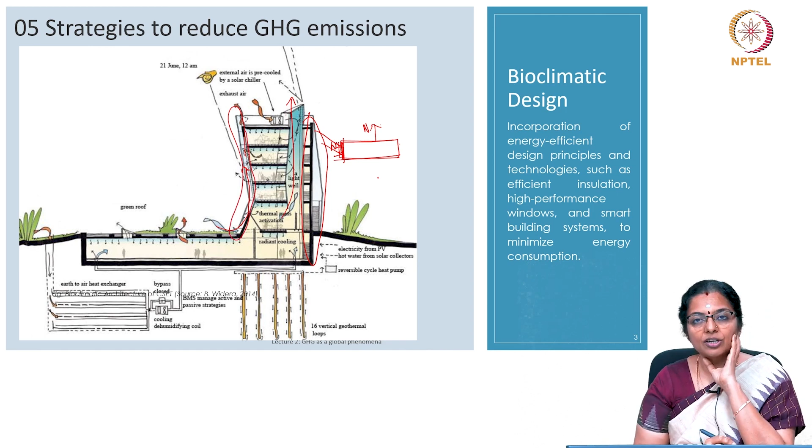Provision for natural ventilation. Here in this building you can see that there is provision for not only natural ventilation but different types in which the ventilation can happen. You have the ventilation along this, you have a shaft ventilation and so on. Then energy efficient envelope, the design of the envelope itself should be such that the building consumes less energy by virtue of making the indoors comfortable. This approach utilizes many features: orientation, natural ventilation, envelope design to decrease the load on artificial heating and cooling, thereby lowering energy consumption and greenhouse gas emission.

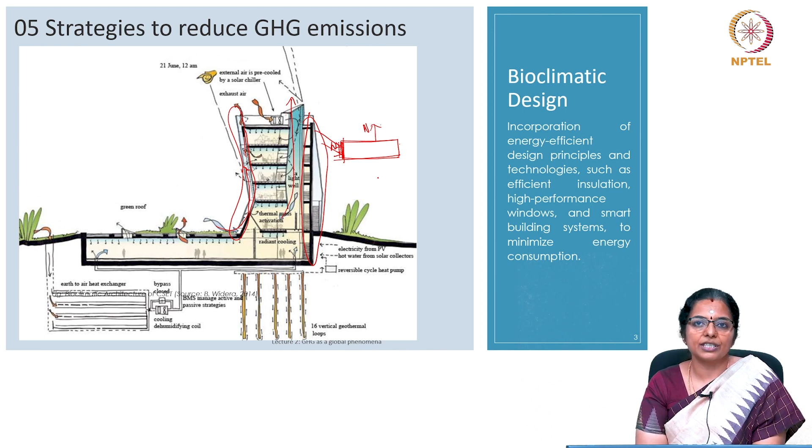Additionally, integration of renewable energy sources like solar panels and wind turbines and other sources of renewable energy, a focus on natural lighting and water conservation practices also enhance the overall environmental sustainability of bioclimatic buildings. In essence, the principles of bioclimatic architecture offer a holistic strategy to create structures that not only prioritize energy efficiency but also contribute substantially to the reduction of greenhouse gas emission.

Now, another strategy that can be used is renewable energy integration. Integration of renewable energy can happen in two ways. It can be on-site or off-site. So, renewable energy integration in the building industry involves incorporating sustainable energy sources to power the structure efficiently. It entails efficient powering of structures by incorporating sustainable sources. What are the sustainable renewable sources?

Solar is one, especially in a tropical country like India. Solar energy is the way to go. Solar panels. We have abundant resources for wind turbines. There are many places in the country where there have been sustained efforts to tap the potential of wind energy. The on-site clean energy generation reduces reliance on traditional power grids, cutting carbon emissions and promoting environmentally sustainable buildings. The shift not only contributes to a greener and more sustainable energy mix, but it also aligns itself with global initiatives to combat climate change.

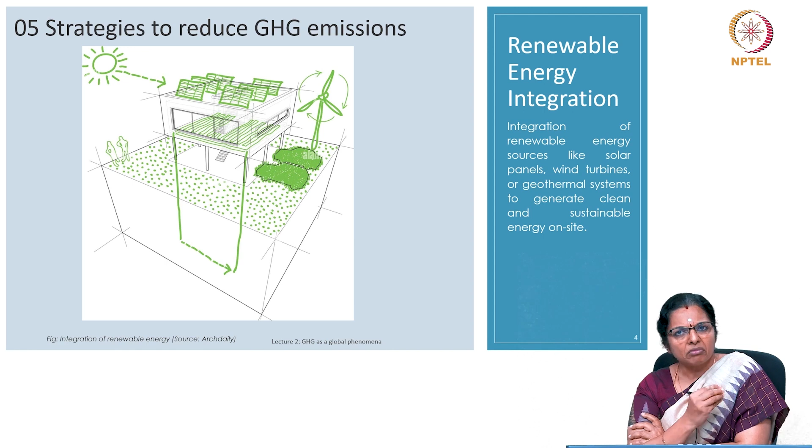Relying on natural resources and harnessing the natural resources, buildings can reduce their reliance on power grids, thereby lowering carbon emissions, because we already saw in last class the humongous amount of carbon emission because of the reliance on conventional heating strategies. And it leads to environmental sustainability by reduction in GHG emissions. The integration of renewable energy in the building industry not only contributes to a greener and more sustainable energy mix, but also aligns with the global efforts to mitigate climate change.

So, how all can we have this integration? We can have this integration by having solar PVs integrated in the buildings itself. The building itself can host it, or it can be off-site. Off-site meaning there can be solar panels which are not on the site, and the energy that comes from this can be given to the grid, and that energy can be used here in the building. That energy can come back here, or it can remain with the grid also.

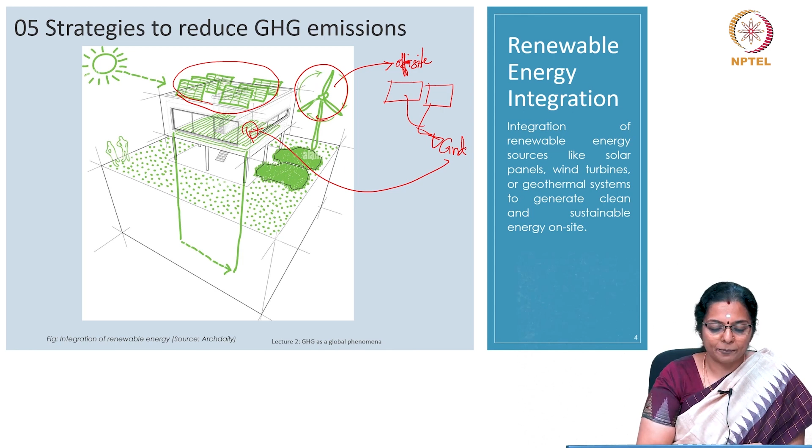That's up to you. Again, wind energy can be off-site. Normally, wind energy is off-site only. It is very difficult to have wind energy on-site, and so on. So, these are the larger strategies.

Another strategy is trying to get green building certification. There are a number of green building certifications in every country. For India, we follow LEED India, or we also follow what is called as GRIHA. So, right now we are having two major certifications. The third could come, which is called as the EDGE certification. So, these are largely Indian certification, LEED India,

At this time, in this class, we are not going to talk of certification, and therefore I am not speaking more on this, but we could have LEED India, GRIHA, EDGE. These are Indian based. All the other things that I am quoting here like BREEAM, CASBEE, Passive House, they are all adapted in Europe and the US.

So, of all the categories, in all of these green building certifications, consumption of energy, the amount of points, that is every building has to score certain points in some or many of the criteria. So, what happens is almost 30 to 35% of the points that are found in any of the rating system is attributed to energy efficiency. So, it is found that energy efficiency consists of 30 to 35, normally we will keep it as 32, of all the points available on average for the rating systems

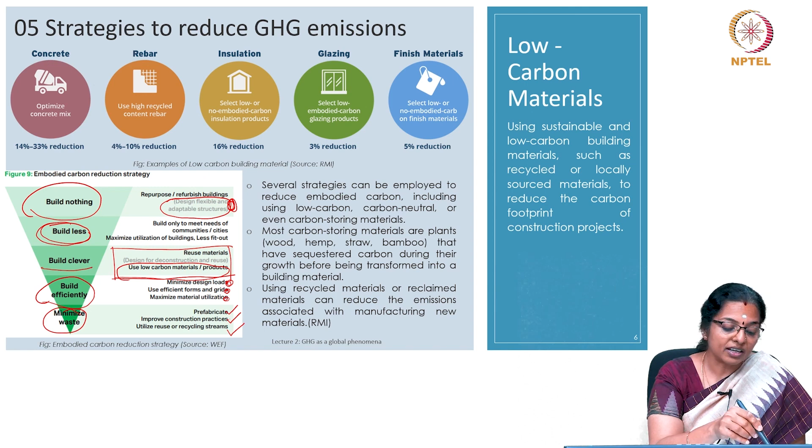Other strategies in general: we can optimize concrete mix. By optimizing concrete mix, there can be a reduction of up to 33% of GHG emissions. Next is rebar, that is, use high recycled content rebars, because steel is a very energy intensive industry, and that can result in about 4 to 10% reduction in GHG gases.

Insulation. So, we can select low or no embodied carbon insulating products. In a country where we have varying climate types, there are certain climates where insulation is not even a criteria, but in cold places it's a very important criteria, and there we have to select low or no embodied carbon insulating products that can result in up to 16% reduction in GHGs. Glazing: select low embodied carbon glazing products. This can cause a reduction of up to 3%.

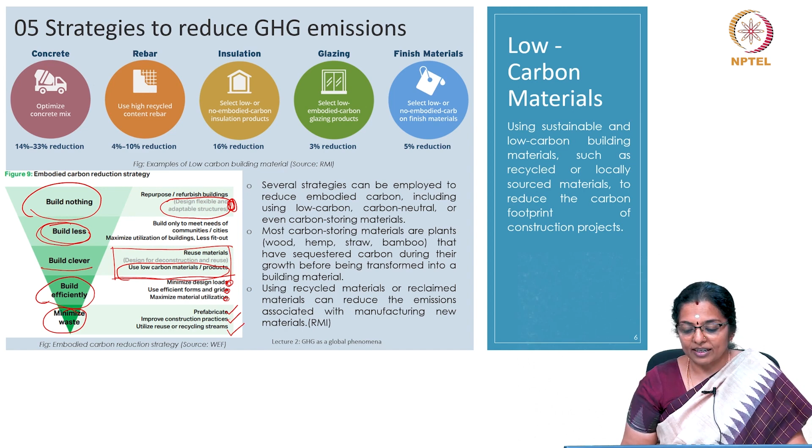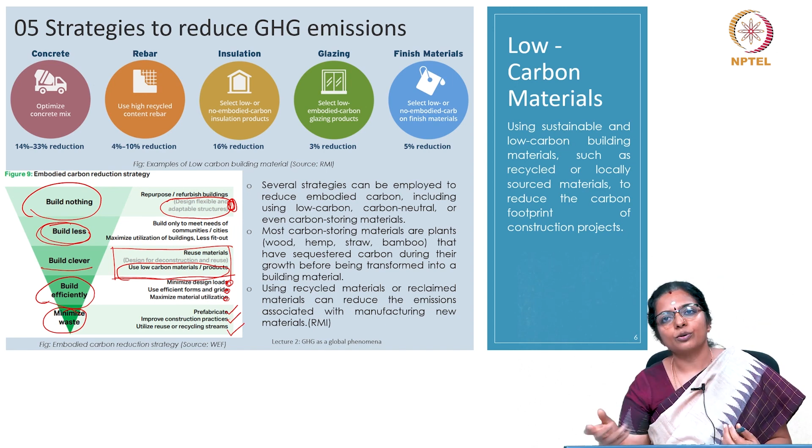Finish materials. So, select low or no embodied carbon finish materials. The kind of carpet: what do you use for carpet? If you are going to have more organic elements in the carpet, it is going to be low carbon, and if you are going to have synthetic materials, the embodied carbon is going to be very high. More embodied carbon, more GHG emission.

The next strategy: the measurement of GHG's impact is determined through global warming potential, as we already discussed, and it is expressed in carbon dioxide equivalent, that also we have already seen. Assessing a product's embodied carbon involves a life cycle assessment. What is life cycle assessment? We are going to look at it in great detail, but this life cycle carbon assessment analyzes environmental impacts at each stage of the product's life cycle.

So, you are not looking at building as a momentary product. You are looking at the consumption of carbon or the emission of GHG right from the raw material production phase, which is nothing but how do you extract the raw material for a particular product, and what all carbon emissions happen at that time.

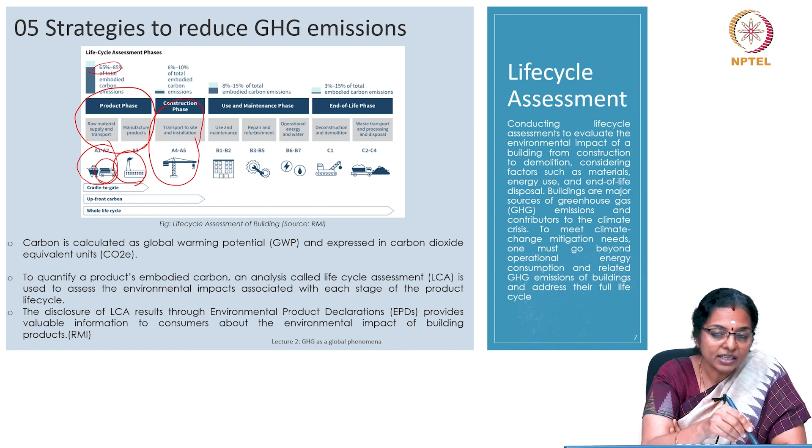For example, in the production phase, between 65 to 85% of the total embodied carbon emission can happen at the production phase itself. Now, reserve the word embodied carbon emission because we are going to look at it in greater detail in the forthcoming classes. Just understand that embodied carbon emission has got a direct relationship to greenhouse gas emission.

So, it means sometimes up to 85% emission can happen at this stage itself, and about 6 to 10, or I would even say 15% can happen at the stage of construction. Use and maintenance phase is another. There again 8 to 15% of embodied carbon can get emitted. Then 3 to 15% can be during its demolition phase. So, all this comprises the phases of construction, and at each of these phases there is going to be

a carbon emission. So, anyways, we can just go through what is carbon equivalent. Carbon is calculated as a global warming potential, which we already saw last class. It is called GWP, and it is expressed as carbon dioxide equivalent units, CO2e, because you will come across this word quite frequently in the subsequent classes.